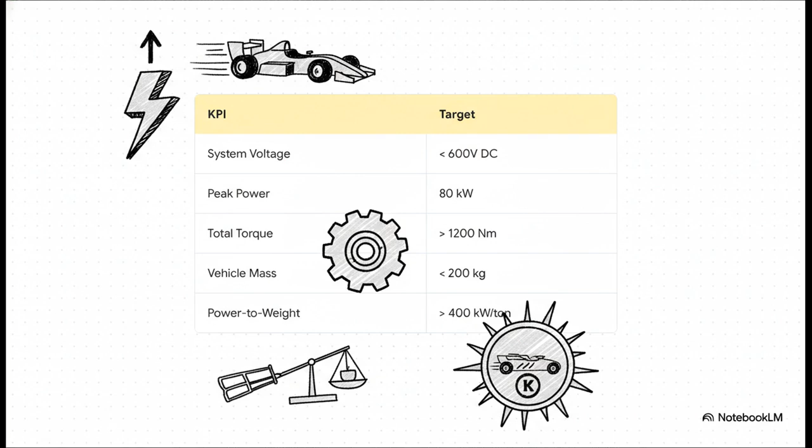So why are these two decisions, high voltage and four-wheel drive, so absolutely critical? Well, because this isn't about style or preference, it's about pure physics. We're literally engineering an unfair advantage right into the car's DNA.

Now check this out, it all comes down to the simple, brutal math of electricity. Remember, power equals voltage times current. And since our power is capped at 80 kilowatts, if you double your voltage from, say, 300 to 600 volts, you get to cut the current in half. But here's the real magic: heat loss, all that wasted energy, is proportional to the current squared. So halving the current doesn't just halve your losses, it quarters them. A 75% reduction in wasted heat means you can use lighter wiring, you need a smaller cooling system, and way more power actually makes it to the road.

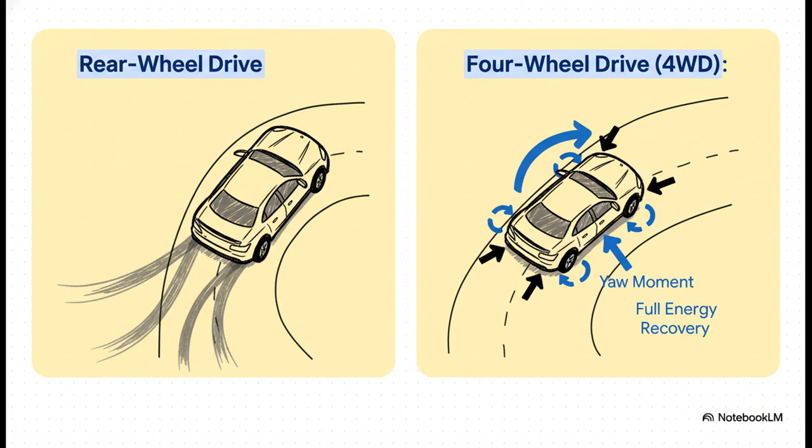And that brings us to the second part of our unfair advantage. A rear-wheel drive car is always going to be limited by its rear tires, but a four-wheel drive car's secret weapon is something called torque vectoring. By precisely controlling the power to each of the four wheels independently, you can create an extra turning force, a yaw moment, that literally rotates the car through corners faster than its tires alone should allow. Oh, and you also get to recapture braking energy from all four wheels, which is a massive bonus in that long 22-kilometer endurance event. All right, with our core physics advantage locked in, we can move on to the heart of the car, the battery.

And let me tell you, this is not just a box of cells. This is the most technically dense and critical system on the entire vehicle, and the strategic choices you make here are everything. So here's the absolute key to battery strategy.

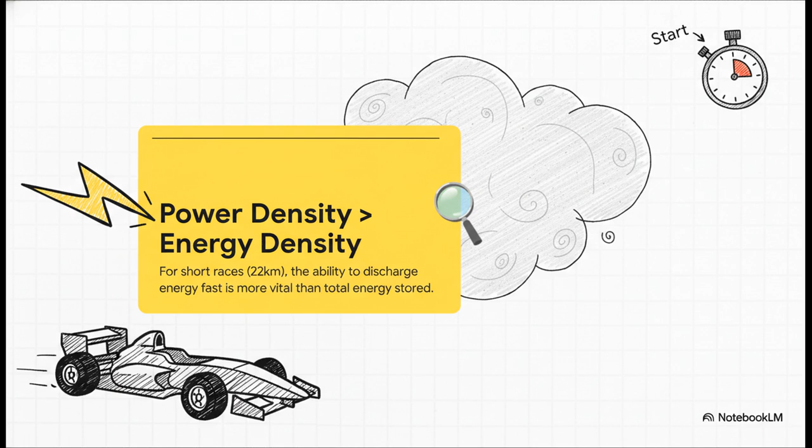For a short 22-kilometer race, you don't need a marathon runner's endurance, you need a sprinter's explosive power. And that means we need to prioritize what's called power density, the battery's ability to discharge its energy incredibly quickly, over energy density, which is just the total amount of energy it can store. It's about the sprint, not the marathon.

And that one decision leads us right here. You see, while cells like the Sony VTC6 are a proven choice and the Samsung 25R is super lightweight, the Molicel P45B is the clear winner for our strategy. And why is that? It's because it has an extremely low internal resistance.

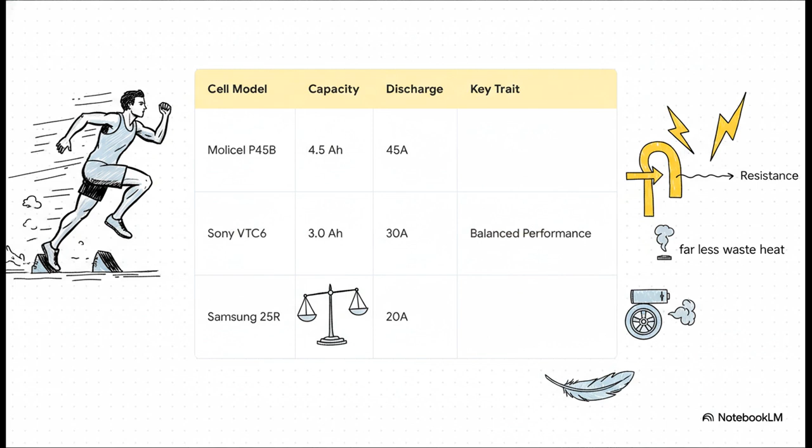In simple terms, that means when you demand a huge burst of power, the voltage doesn't sag, and it generates way less waste heat. It is the sprinter we've been looking for.

Here's exactly how we stack those cells together. We'll use 420 of them, configured as 140 in series and 3 in parallel. That 140 series number is one of the most critical details in this entire blueprint.

The rules say you cannot exceed 600 volts, ever. A lot of teams build a 144 series pack, but its fully charged voltage is over 604 volts. That's an instant disqualification. This design bakes in a professional 12-volt safety margin. You will pass tech inspection every single time.

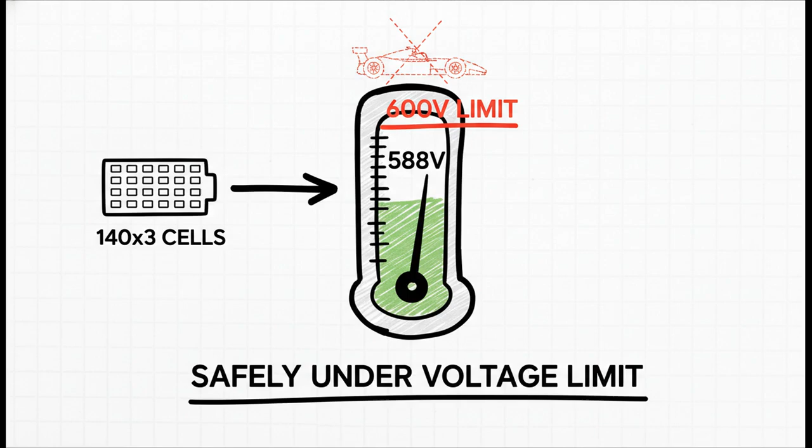Okay, so our energy source is locked in. The battery is ready to go. Now, how do we convert all that potential into 80,000 watts of controlled violence and truly record-breaking speed?

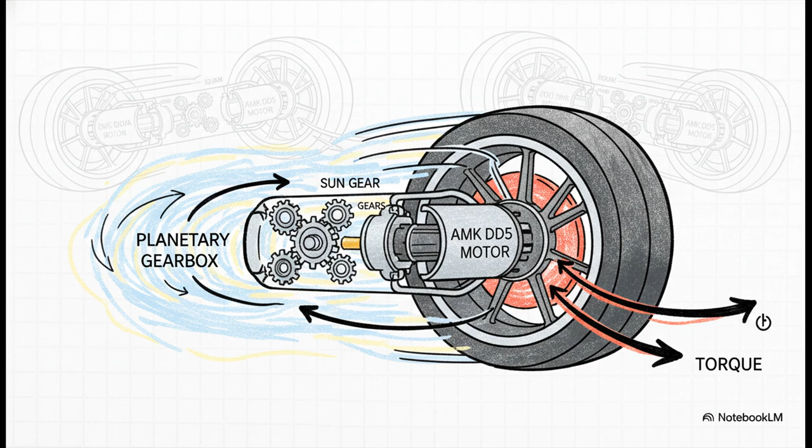The choice here is pretty much the industry standard, and for good reason: 4 AMK DD5 in-hub motors. But look at that number, 20,000 RPM. That is just screaming fast, and that incredible speed is what allows the motor itself to be small and light. All that speed is then converted into massive torque right at the wheel through a beautiful little integrated planetary gearbox.

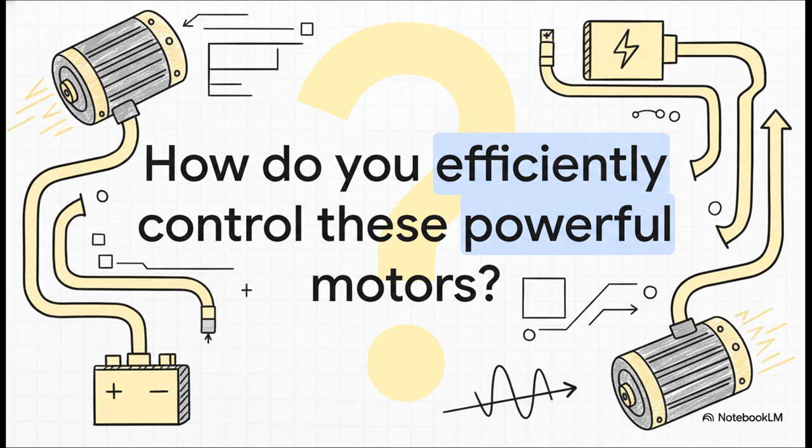So we have these 4 incredibly powerful motors. But how do you actually orchestrate them? What's the critical link that takes the battery's raw DC power and feeds the motors the perfectly controlled AC power they need? And more importantly, how do you do it with almost zero waste?

The answer lies in this number: 99%. That is the insane efficiency you can get from a modern inverter that's built with a game-changing material, silicon carbide.

So why does a 99% efficiency matter so much? I mean, what's a few percent? Well, a 3% gain over older tech means 3% less energy is just burned away as useless heat during that long endurance race. And that directly translates into needing a smaller and therefore lighter battery pack to finish. Saving 2 to 3 kilograms might not sound like a lot, but in motorsport, that's an absolute eternity.

And that brings us to our final section, which you could argue is the most important of all. You see, all the hardware we've chosen so far, that just gives the car its raw potential. But it's the software, the code, that actually unlocks its winning performance. This is the real secret weapon.

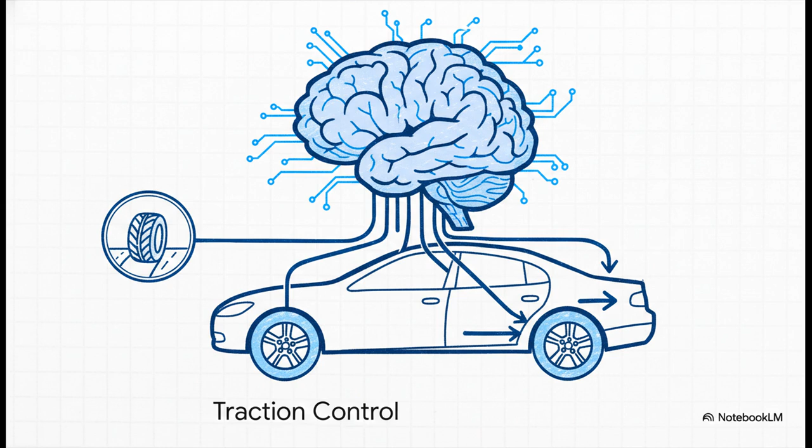At the very center of it all is the Vehicle Control Unit, the VCU. It is, quite literally, the brain of the car. It's what runs all the complex algorithms that make everything work together in perfect harmony. Things like traction control to prevent wheel spin, and that magical torque vectoring that turns our four-wheel drive system into a cornering monster. It's the invisible hand that guides the car to its absolute physical limit.

But this brings up a huge question. Let's be serious for a second. A 600-volt system is incredibly dangerous, and complex software can and will have bugs. So how do you make absolutely sure the car is not only fast, but fundamentally safe and reliable?

The answer is process, a rigorous process. You adopt the exact same V-model development process used by the world's top automotive companies. And the most critical step is something called hardware-in-the-loop testing.

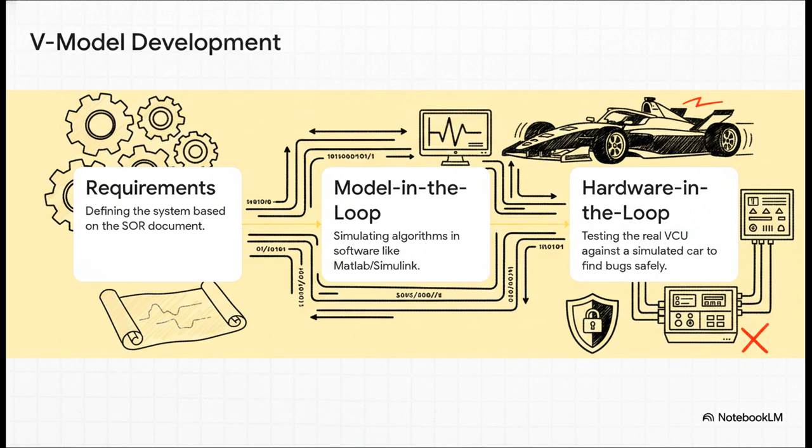This is where you connect the car's actual brain, the VCU, to a powerful simulator that tricks it into thinking it's driving on a racetrack. You can push it to its limits, you can simulate every possible failure, and perfect the code in complete safety, long before that 600-volt system is ever switched on for real.

And then, layered right on top of that software process, you have these non-negotiable hardware safety systems. Think of them as digital seatbelts. The insulation monitoring device is like a smoke detector for any electrical faults.

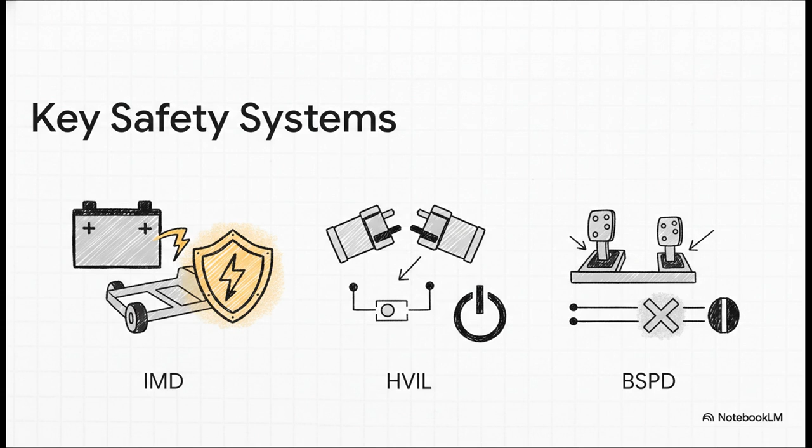The high-voltage interlock is a physical safety loop that makes it impossible to touch a live connection. And the brake system plausibility device is a fail-safe that instantly cuts power if the brake and throttle are ever pressed at the same time. So when you put it all together, you see how these 3 pillars support each other.

The aggressive 600-volt four-wheel drive hardware, that gives the car its raw potential. The advanced software, like torque vectoring, unlocks its ultimate performance. And the rigorous V-model process ensures it's all done with absolute safety and rock-solid reliability.

And that really brings us to the final, most important takeaway. This document, it isn't really about building a faster car. It's about creating a better process and building a stronger team. By following this blueprint, a new team doesn't just build a machine, they build a culture of excellence. And at the end of the day, that is what truly wins championships.